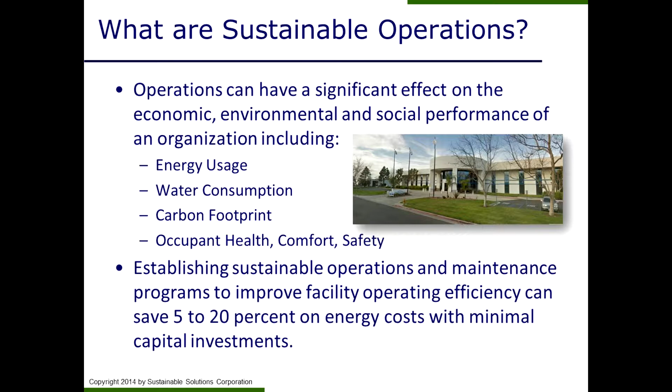So when we think about the benefits of sustainable operations, the #1 priority for many facilities is obviously reducing operating costs. And that means, for example, saving money on electric and water bills, reduced material costs, and also less waste hauling fees. Also, major studies have shown that improved employee comfort is linked to productivity, so that may be especially true if your facility has office areas. There are also potential benefits for increasing equipment life if they're properly maintained.

So for companies with sustainability programs already, those initiatives that are implemented at your facilities can become marketing opportunities because you'll be able to show those decreased impacts and footprint at your facility, and that can help your marketing team develop some literature around that subject.

All right, so let's talk about the business case for greening your operations and what your customers and competitors might be up to. So the first question is, why should you care? Maybe things at your facility seem to be going just fine, or maybe you just don't want to rock the boat or create waves in your organization by suggesting improvements.

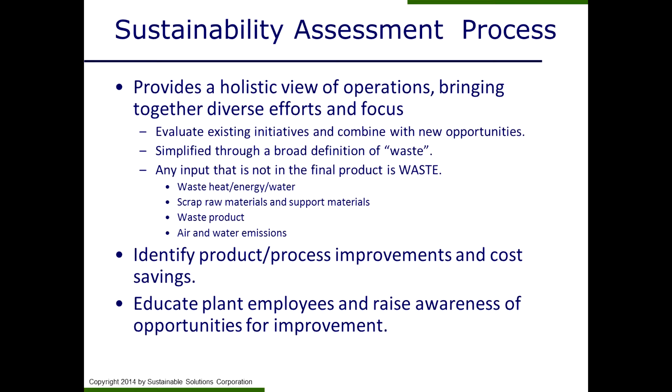Sometimes solutions can be as simple as educating plant employees or raising awareness, and other times those opportunities could require some investment. And in those cases, you need to have some data to back up that investment.

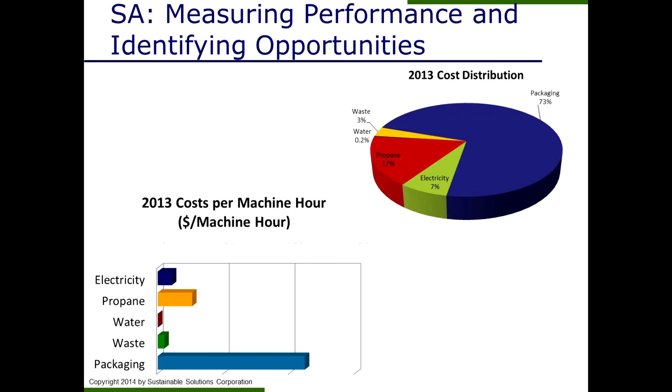My colleague Kara is going to talk more about benchmarking and quantifying results in a few minutes, but once you quantify the payback for your identified opportunities and prioritize them accordingly, you'll be able to flesh out solid recommendations. These can include reduced cost and environmental impact, reduced carbon footprint, recommendations for marketing your green successes if great things are already happening at your facility, and recommendations for sustainable program development.

Now, a sustainability assessment is a valuable activity in itself, but it shouldn't be a one-time thing. It's important to establish a sustainable operations program so improvements can build on each other over time, and so it becomes part of how all employees at your facility operate in their role.

Using the benchmarking data you collect allows you to set goals and develop a sustainability team, or a green team as some locations call them. You can develop a plan and goals with activities to improve performance in various areas, and it's important to get buy-in and agreement from key stakeholders and action owners to hold people accountable in this process.

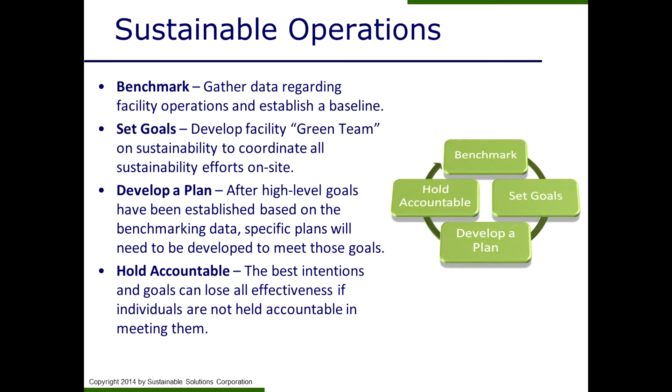All right, let's get into a little more detail and talk about benchmarking and measurement. We've all heard the mantra: if you can't measure it, you can't manage it. If you don't measure electricity, energy, or waste, you won't know if the changes you want to make are even worthwhile, or if you make them, you won't know if they're successful.

So if the company we're working for doesn't already have enterprise software solutions set up, we typically start by setting up some simple spreadsheets to benchmark and understand electricity, natural gas, water, etc., and also look at trends. Looking at trends on a monthly or yearly basis can identify potential opportunities that might not be obvious by observing operations alone, especially over a short time period. Kara is going to go into more detail and show some examples of that in a few minutes.

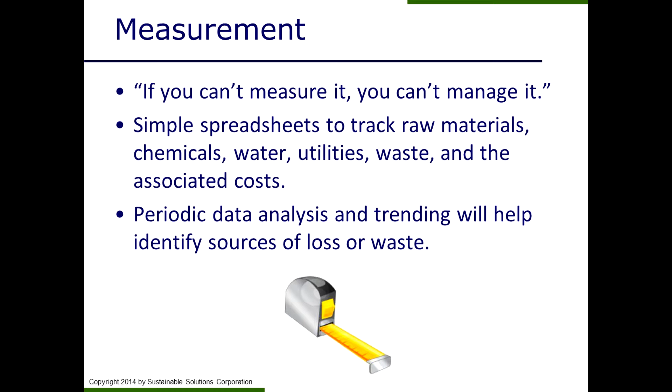So far, I've talked about a sustainability assessment at a high level, but the first thing you need to do, if you haven't already, is benchmark your existing operations. It's often appropriate to quantify the amount of your materials, energy, waste, and other relevant factors per amount of production. So if you measure production in tons, you can do kilowatt hours per ton. If you produce in gallons or by piece, you can benchmark everything per whatever your production is, so that if production goes up and down, your benchmarked amounts remain comparable across time periods.

You'll also want to collect cost data associated with each of those inputs, so you can do a cost-benefit analysis for potential solutions, and if investment is required, you can help create a business case for that.

Once you have your initial benchmarking system set up, you can continue to add to it over time and track your continued progress. For example, let's say you're managing your energy consumption and have a goal established to reduce that consumption by 5% on a per production basis. With the initial benchmark data, you can track your progress toward that goal using your existing benchmarking spreadsheet or system. Sometimes it's difficult to track operations in as much detail as you'd like, so if you're not able to, you might consider adding submeters, data loggers, or other appropriate methods depending on the situation to get the level of detail you need to make the case.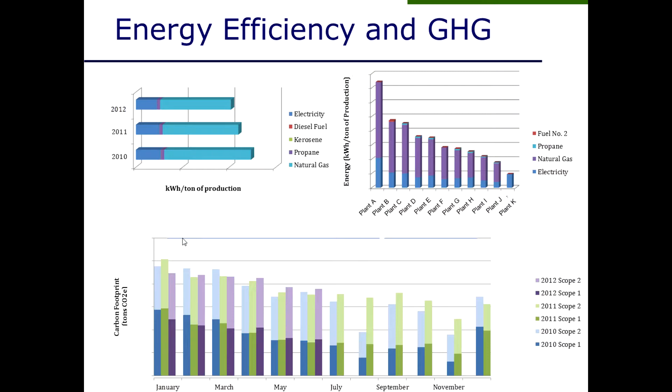One main recommendation for sustainable operations is to look for reductions in heating energy. There are two considerations you can look for. One is just utilizing waste heat—any heat coming off the top of your air compressors, boilers, or heaters that's wasted could be used for space heating or other areas in your operations. Also, look for updating equipment, such as space heaters. Adjusting ductwork and adding more efficient heaters in those areas can often save energy with a decent payback.

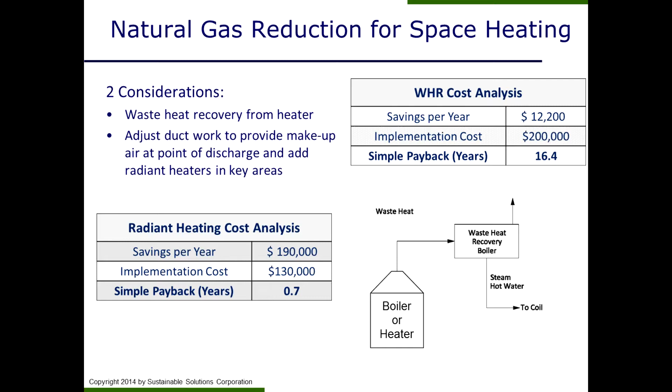On this slide you can see an example of how to quantify alternative solutions to identify waste and present those options in an easy-to-understand way. We considered two possible solutions for a facility that was inefficiently trying to maintain space for occupant comfort. The first idea was to use waste heat from the heater in the coils of the air makeup units to preheat air and conserve natural gas, but the implementation cost was high and payback was long, so decision makers would not go for it. The second solution was to adjust the ductwork to provide makeup air at the point of discharge and improve its controls. We also installed high-efficiency radiant heaters in additional occupied spaces to replace old space heaters. This payback was much quicker and looked more ideal, so this was the suggested solution.

Waste heat recovery opportunities exist in many manufacturing areas. The building in this picture is in a northern climate zone—climate zone 4—with a very high heating load. We were able to collect waste heat from air compressors right behind this wall, using louvers on the ductwork that goes through the wall. The waste heat is then fed into three other spaces in the building, allowing the natural gas used to heat that space to be shut off. You could also collect waste heat from boilers, dryers, and other process equipment, not just for building heat but for preheating materials or even drying.

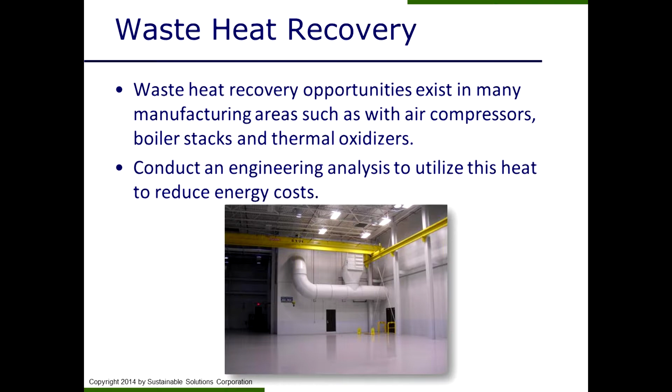Another item to consider is wasted heat from open doors. The amount of time a door is open affects the air exchanges within a building. High-speed roll-up doors minimize infiltration and exfiltration and can be designed with insulation to improve the building envelope. This also helps isolate truck bays and allows forklifts to come in and out easily because the doors are high speed. Also, enforcing the habit of closing roll-up doors when not in frequent use is another good starting point to saving energy.

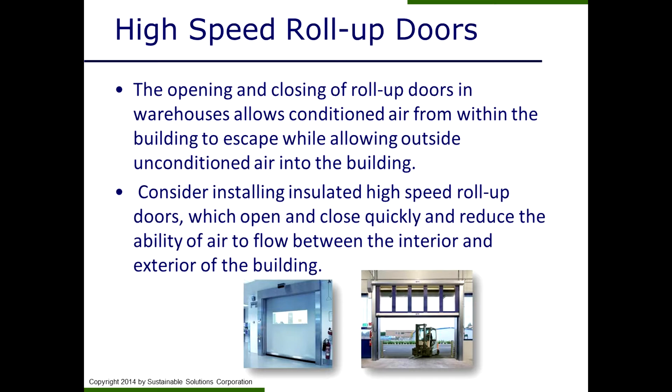This is the same building I mentioned before with the waste heat recovery, but I also wanted to mention a few other things done in this space. High bay lighting uses T5 fixtures along with tubular daylight devices, or TDDs. In this picture, the round TDDs are the same brightness as the T5 electric fixtures. There are also daylight sensors installed to detect how much light is coming into the space from the TDDs, to make sure the space has the desired lighting power density, and the sensors will turn the T5s off if there's too much light. There's actually a waiting list for employees wanting to work in this space because of the daylighting.

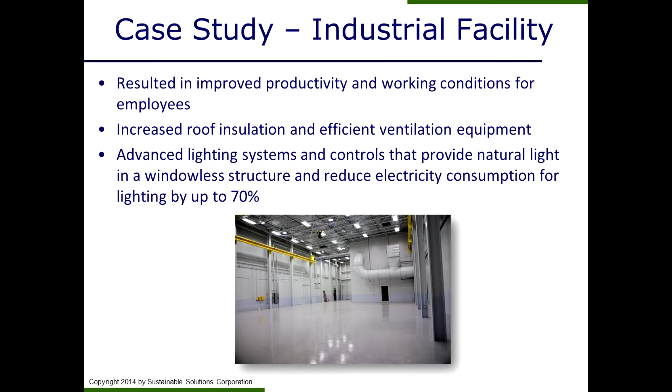Employees working in this space have decreased absenteeism, and all the materials have recycled content and low VOCs as well. Additionally, a white roof was installed with additional insulation to help, and four-way fans were added that kick on at night to cool the space, as well as when outdoor conditions are cool.

And there are many other very low-cost opportunities for operations to consider in a sustainability assessment. With process equipment, just frequent adjustment and tuning of the equipment can keep energy efficiency high. I've been to a site before where the thermal oxidizer hadn't been tuned in quite a number of years, and just by that simple low-cost process of tuning it, almost $200,000 were saved in that next year just from propane reductions.

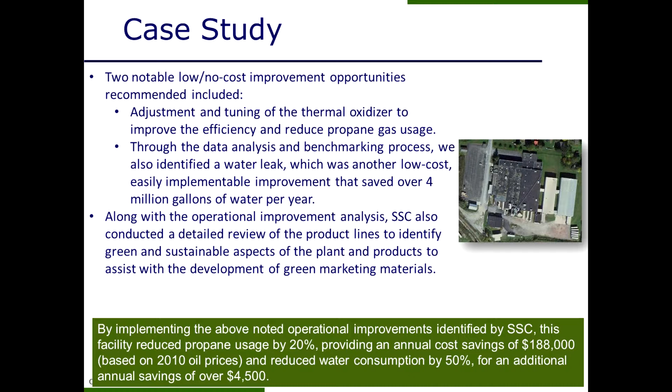Also, just by reviewing the benchmarked water data in that facility, we noticed that they had high water consumption compared to previous years, which led us to an investigation of water flows in the manufacturing process. A water leak had been found which, when fixed, saved over 4 million gallons per year. At the time it wasn't picked up by them because water costs were so low, but now that water costs are increasing, it was definitely noticeable.

Here is a sample of that water consumption of the facility I just mentioned. You'll notice that the consumption for the first half of 2012 was basically the same amount as the entire year before it. Just investigating water flows through a facility and identifying where water is being wasted in operations can provide large water savings and costs.

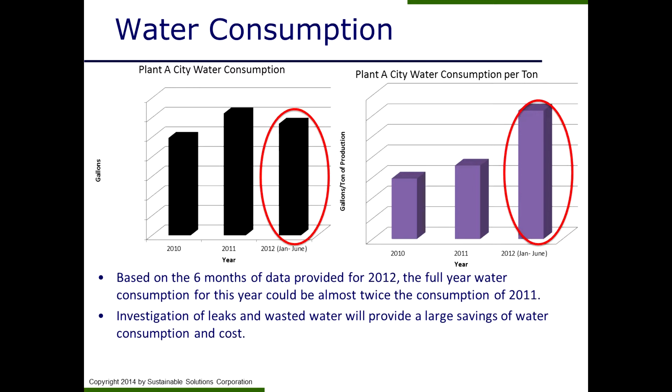Check for open valves that can be shut, and look for opportunities that can use lower flows or closed-loop processes. Water is an area that is increasingly becoming of concern, as Jim had mentioned, just due to the scarcity in so many regions. Every building is going to have at least restrooms where water needs to be managed.

Low-flow aerators can be installed on any faucet, and they're pretty cheap too. You can also do a toilet retrofit and switch to dual flush, which means you only have to change the valves, not the entire toilet fixture. Low-flow shower heads also allow you to save water and hot water, and by saving water you also reduce the energy used to heat that water. Also, water heaters such as electric or tankless can also be used to save money.

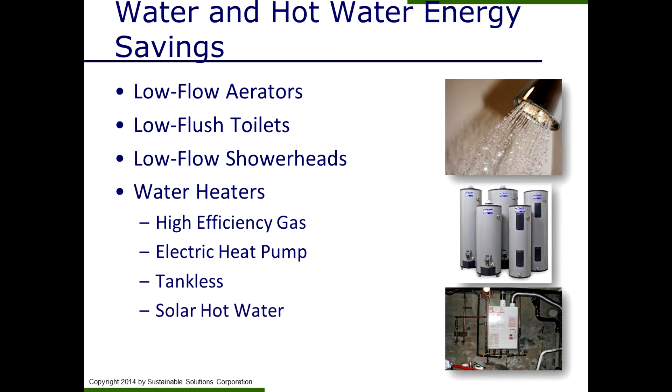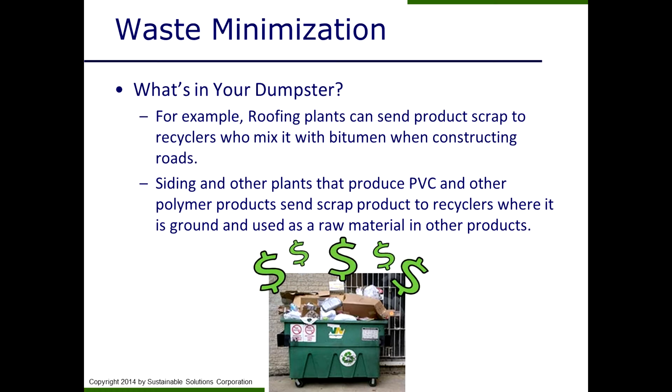Also, developing a site-specific sustainability team is another aspect of sustainable operations. Incorporating a policy such as a sustainable operations checklist and guidelines can be used by personnel for preventative maintenance. These guidelines could provide strategy and guidance on providing maintenance, as well as identify continuous ways to improve efficiency for water and energy, and help provide ideas on how to reduce waste in your plant as well.

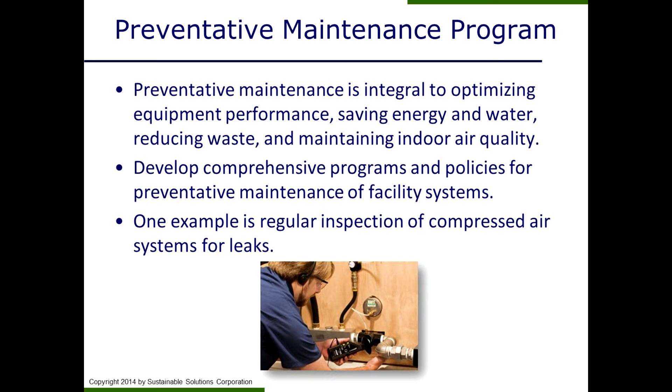Now, not only does incorporating a checklist and guidelines on sustainable operations help with conservation, these guidelines might also be used for purchasing at your facility. By providing guidance for new equipment, more efficient equipment can be installed instead of just the cheapest solution that's available.

For example, say you need to buy a new air conditioner in your office area. One vendor trying to just make a sale might recommend one of the cheapest solutions to fit your need, but it might be an energy hog and just not very efficient. If you have a checklist in place, this might help your purchasers look at various items on what to look for when replacing that equipment, and that way you can save money down the road with a certain payback. That's just one example with an air conditioner.

Sustainable checklists and guidelines can also provide insight for plant equipment as well.

So now that we've talked briefly about sustainable operations, let's talk about how sustainability assessments can actually contribute to your overall sustainability program. As a reminder, sustainability means that your company can stay in business for the long term, that it's profitable with good social responsibility and minimal environmental impact.